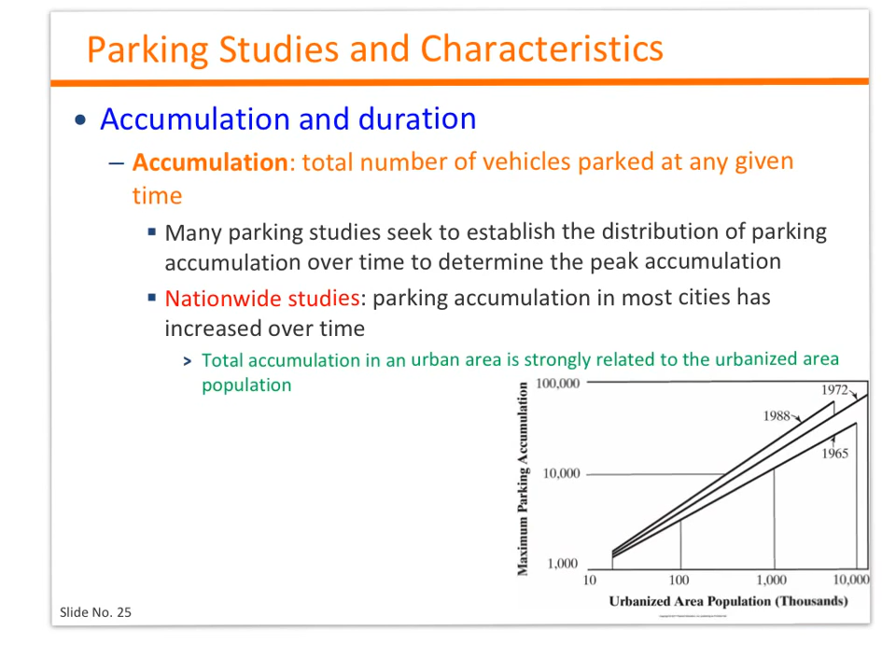So once I increase the number of population by a certain amount of people, the demand for parking would be way higher.

When it comes to duration, this is now a time measure. It's the length of time that individual vehicles remain parked. So now we're interested to know what's the average time that each one of these vehicles at any facility would be parking.

Average parking duration is also related to the size of the urban area, with average duration increasing with urban area population as well.

As you can see in this graph, the duration is increasing as the urbanized area population increases. For the same thing, if we pick a city like Tyler here, this is the size of Tyler.

If you could see here, the average parking based on this study shows it's around an hour and a half, versus another city that has, let's say, a couple million people, so it's going to be somewhere around here, and now it's about 3 hours.

So there is, as you see, a clear relationship between the increase in the number of people in the city and its relation to the parking need.

This table here is also very interesting, showing the average duration of parking in two different cities as well as two different times. For example, we are comparing Boston in 1972 with Charlotte in 1987.

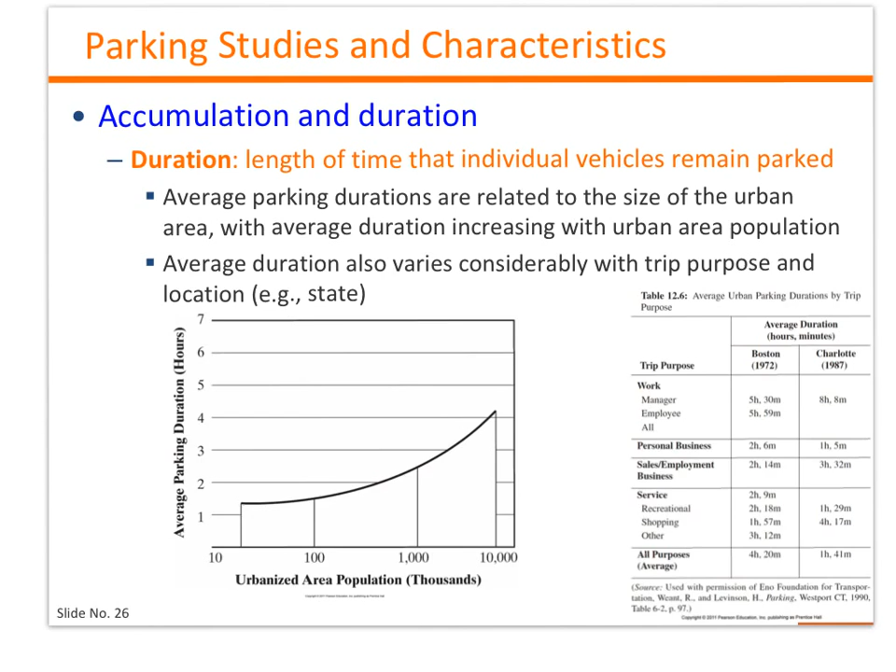So the question now, how are we gonna measure the accumulation and duration in a parking spot? The most commonly used technique for observing duration and accumulation characteristics of curb parking and surface parking lots is by simply recording the license plate numbers for the parked vehicles.

Most of the time, you're not gonna write all the plate numbers. We typically have the last 3 digits. We record the last 3 digits, as you could see here in this form. So 631, that would be the last 3 digits for that plate for that car.

Something interesting we need to keep in mind when we do a parking study: we need to keep going through the parking spot at regular intervals ranging from 10 to 30 minutes. For example, this study here started at 7, and you would notice a car at a certain location, then you come back at 7:30, 8, 8:30. This study was done every half an hour, so the interval is every half an hour. While, if I'm asking you to do a parking study for 1 hour, the interval will be a bit less, typically every 15 minutes.

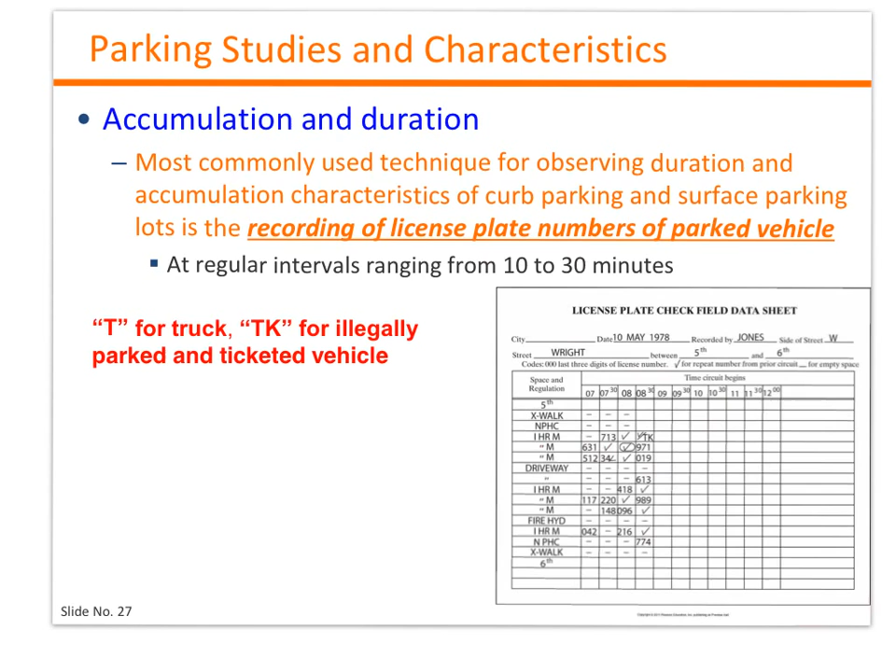So how can we do the calculation? The two equations we need to obtain and calculate: the first one is the average parking duration, which is D. D is simply the average parking duration, how many hours per vehicle - I'm interested to know every vehicle is spending how much time at the parking facility. This is equal to the summation of NX, which is the number of vehicles parked for X intervals, times the number of that interval parked.

Another characteristic we are interested to measure and obtain is the parking turnover rate. TR, turnover rate, is equal to NT, which is the parking turnover, the total number of parked vehicles observed, over the multiplication of PS times TS. PS is the total number of legal parking stalls, times TS, which is the duration of the study period.

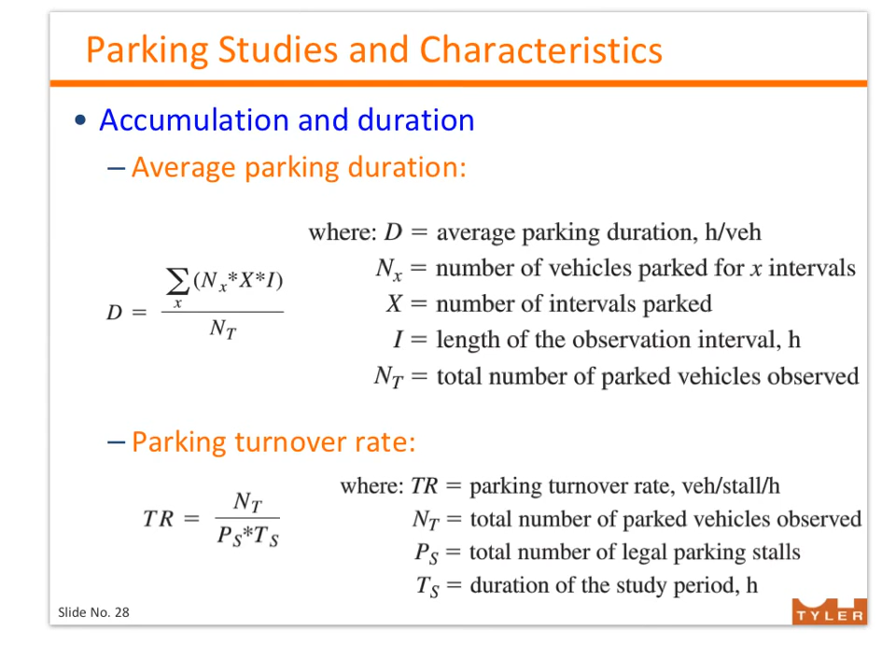And we're gonna go through an example and see how we calculate these two numbers. This here, table 12.7 in your textbook, shows a typical parking study field sheet for one location. This is for just one block out of several blocks in the same parking facility, because you cannot do the entire parking facility all at once - we will divide the parking facility into several blocks. So table 12.7 is showing the information and the parking field sheet for block face 61.

And for this parking spot or parking block named 61, there are that many parking spaces. So there is parking space named 1, 2, 3, 4, and there is a hydrant, and then we're having 1, 2, 3, 4, 5.

We have 5 parking spots with a 1 hour limitation, and 4 parking spots with a 2 hour limitation. The parking study starts at 8 and finishes at 3, and the interval is half an hour. So I would go observe the parking block, wait for half an hour, come back and observe it again to make my observations.

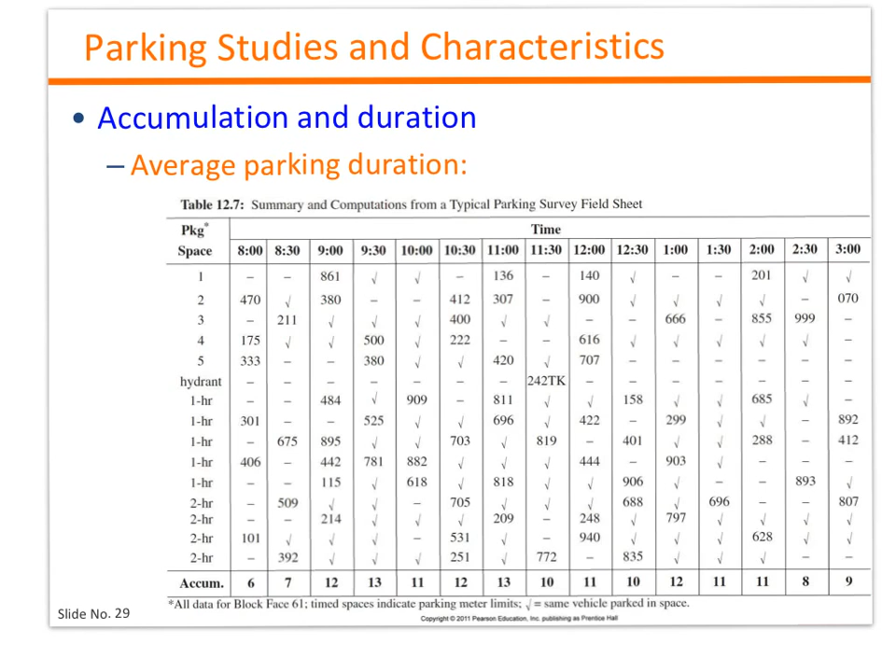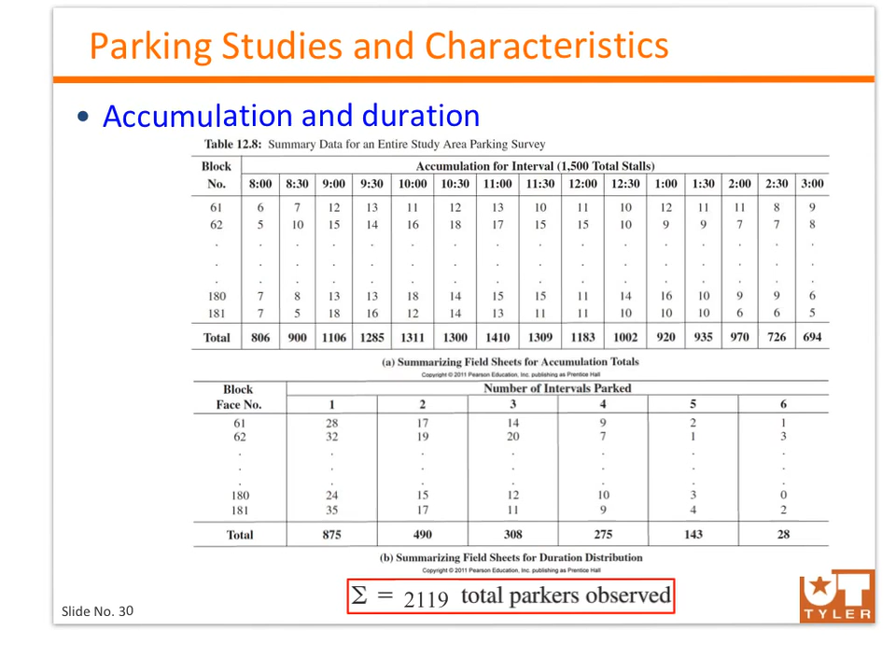Now that we understand the two equations, for convenience only the last 3 numbers of the license plates need to be recorded. In most states, the initial 2 or 3 letters or numbers represent a code indicating where the plate registration was issued, so these are often repetitive for many plates - that's why we don't include them.

How can we get the average duration? Going back to the equation: we have 875 vehicles who stayed for one interval times 1 - this one interval times 0.5, which is 0.5 hours, half an hour. We also had 490 vehicles who stayed for 2 intervals times 0.5.

And the list goes all the way until we had 28 vehicles times 6, who stayed for 6 intervals times 0.5, which is half an hour. So here, when I multiply 3 times 0.5 or 2 times 0.5, I'm multiplying the number of intervals times the interval length, which gives me the total amount of time each vehicle stayed over the total number of vehicles observed, and this gives us the average duration. So on average, every vehicle is staying there for 1.1 hours, coming and then leaving.

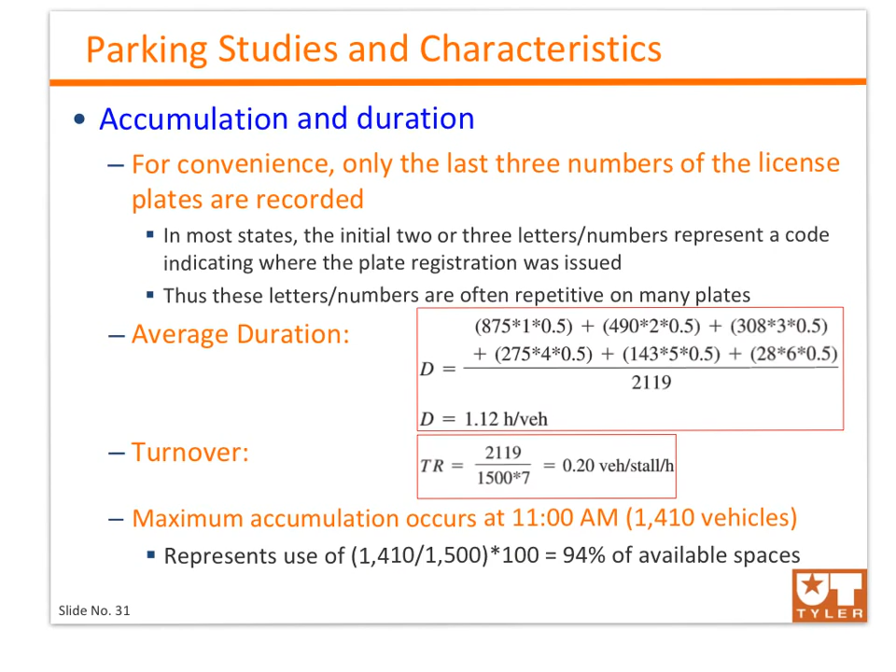Now let's shift gears to the design aspects of parking facilities.

When it comes to off-street parking facilities, they're provided at surface lots or parking garages. Most of the time surface lots are considerably cheaper than garages, typically costing between $1,000 and $3,000 per space. Garages are more complex, and below-ground garages are far more costly than above-ground structures. Typical cost for above-ground garages ranges from $8,000 to $15,000 per space, while below-ground garages may cost between $20,000 and $35,000 per space.

So that shows you the increase of cost from a surface lot to a garage to a below-ground garage. The decision of how to provide off-street parking involves many considerations. As a traffic engineer, we have to think of factors such as availability of land, amount of parking needed, and the cost to provide it.

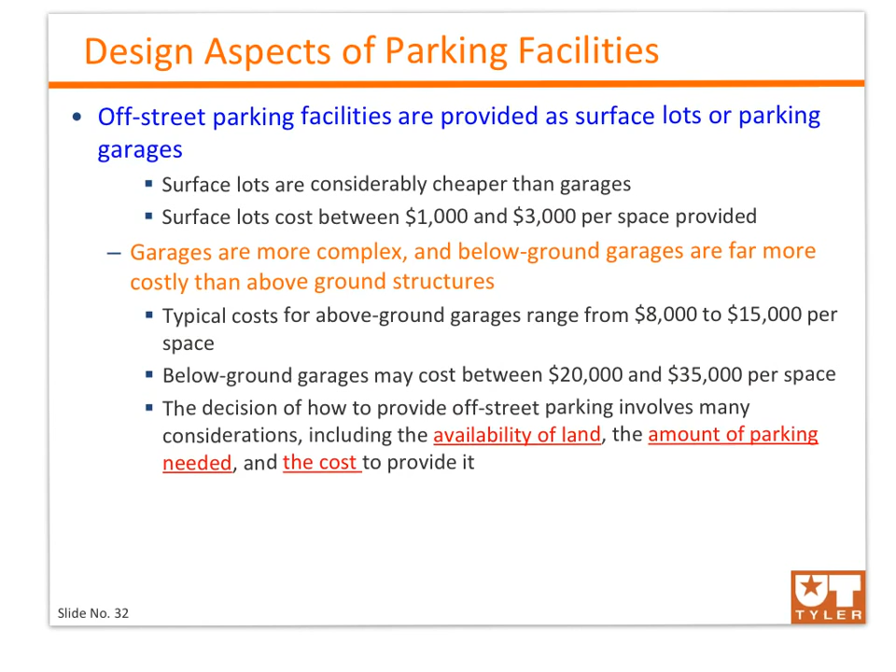For example, if you are in a packed, very urbanized city, there isn't much availability of land, so you have to think of below-ground garages, for example. You also need to keep in mind how many parking spots you need versus the cost available to come up with the parking facility.

There are three major objectives in the design of any parking facility a traffic engineer must keep in mind. First, it must be convenient and safe for the intended users. Proximity to major destinations, as well as adequate access and egress facilities, is very important. Also, these parking facilities should be space efficient and economical to operate. If it's super expensive, people will ignore the place or avoid that business center altogether, so efficient internal circulation, adequate stall dimensions, and basic security must be there.

So again, efficiency and economy. Economy: is it affordable or not? Efficiency: if I want to get to that parking spot, is there a circulation system, or just one exit? Do I have enough space for my car? And also, do I have enough security? Do I feel secure if I'm parking on the 5th or 7th story of a parking structure?

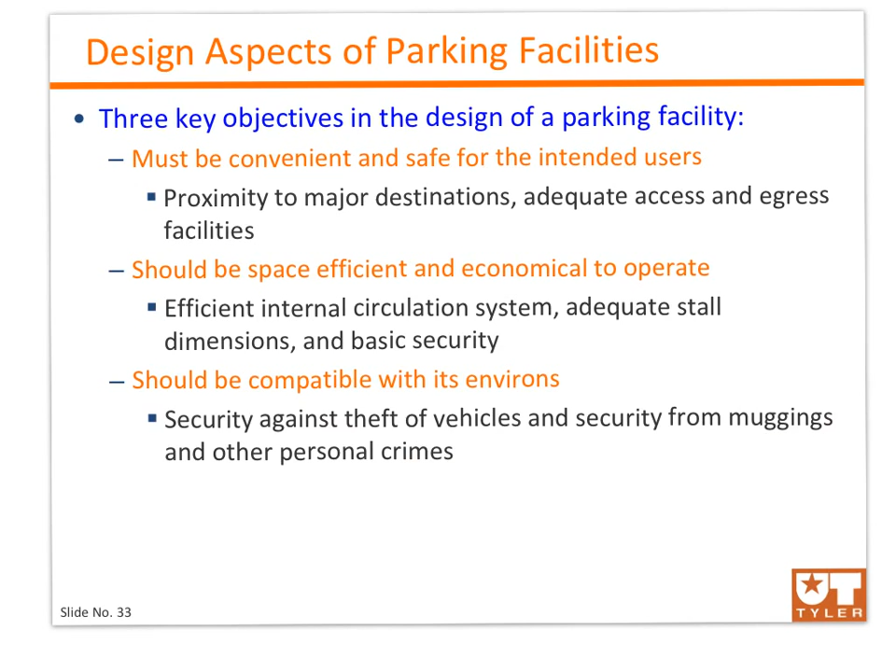The third objective is that these parking facilities should be compatible with their environment, including security against theft of vehicles and security against muggings and other personal crimes. Parking spots have to always be monitored, and the sense of security has to be high at these locations to let people park safely.

So speaking of dimensions, let's talk about basic parking dimensions, based on one of two design vehicles, where you typically have either large or small cars. Some parking facilities try to use separated parking areas for small cars to maximize the total parking capacity, which is one of the techniques used.

So as you can see here, I'm giving you some information related to the design dimensions for parking facilities for large cars versus small cars.

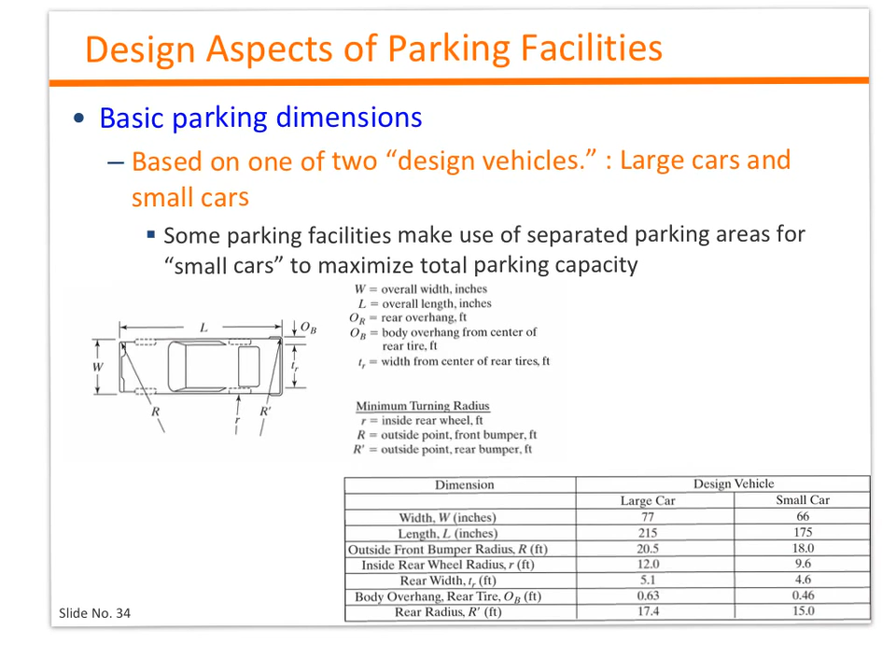One of the important dimensions is the width of the car, W. For small cars it's 66 inches versus 77 inches for large cars. When it comes to the length of the car, L, it's 175 inches for small cars versus 215 inches for large cars, all the way to information like rear radius in feet. For small cars they need 15 feet as rear radius versus 17.4 for large cars.

One of the big components when it comes to parking facility dimensions is the parking stall width, W, like what we talked about. It must be wide enough to encompass the vehicle and allow door opening clearance. It's not just the width of the vehicle, because you have to open the door to leave the car. So we have to have a minimum door opening clearance of 22 inches, but this may be increased to 26 inches where turnover rates are high.

For example, for large cars, the parking stall width should range from 77 inches, as provided in the previous table, plus 22 inches, giving us 99 inches, which is about 8.25 feet. For the maximum width, it's 77 plus 26, which is 103 inches, or 8.58 feet. So those are the minimum and maximum width for large cars.

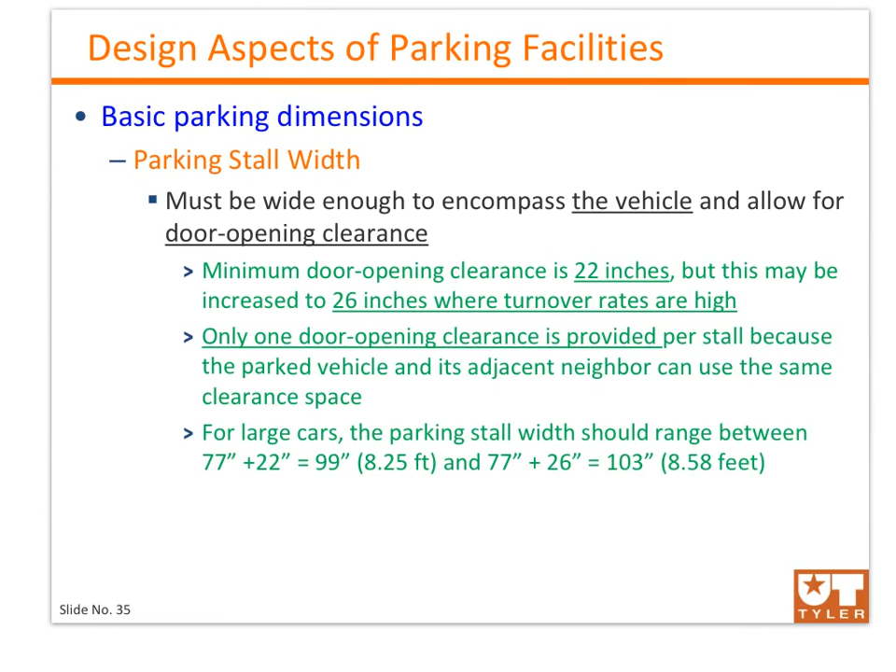Here in this table I'm showing you that there are 4 parking classes depending on turnover rates and typical users. For parking classes A, B, C, and D, the stall width can go from as high as 9 feet to as low as 8.25 feet depending on the typical turnover. If it's low turnover and the parking class is C or D, the width is 8.5 versus 8.25, while if the turnover is really high, the stall width goes all the way to 9 feet.

Typical usage for parking class A includes retail customers, banks, fast foods, and other high-turnover facilities. Parking class D is for industrial sites, universities, and commuters, where turnover is very low—you park your car for several hours, so there's no urge for a wide stall, which is why it's 8.25 feet. Versus if you're going to an ATM in front of a bank while in your car, the turnover is really high and the stall width is high.

So for small cars, the parking stall width ranges from 66 plus 22, which is 88 inches, all the way to 66 plus 26 inches, which is 92 inches. That would lead us to the design standard for small cars being typically 7.6 feet—that's the typical design width for small cars.

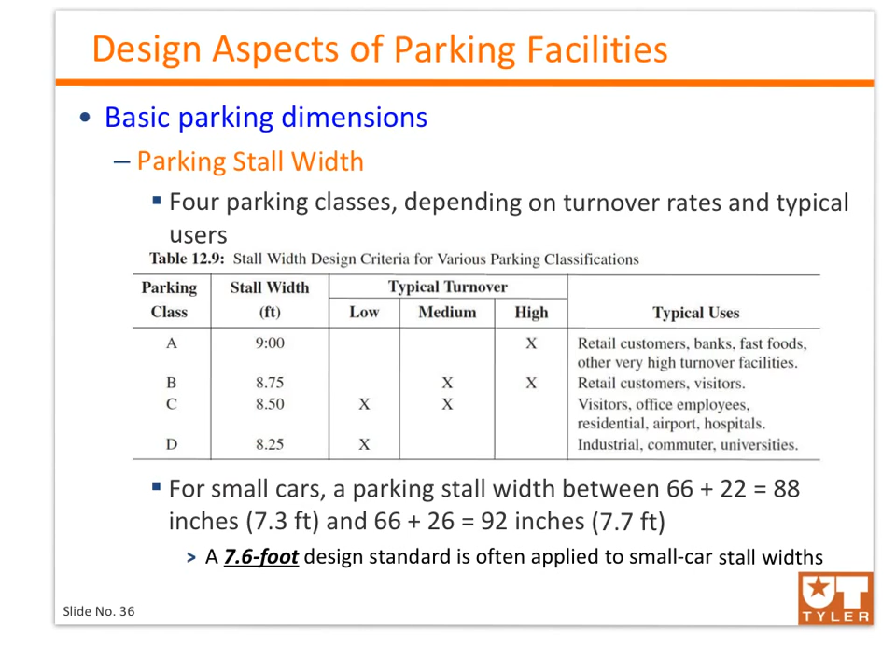When it comes to the parking stall length and depth, it has to be measured parallel to the parking angle. Generally it's taken as the length of the design vehicle plus 6 inches bumper clearance. So a length of, for example, 215 inches for large cars, like mentioned in the previous table, plus 6 inches, gives us the length. The recommended length for the parking stall is 221 inches, which is 18.4 feet.

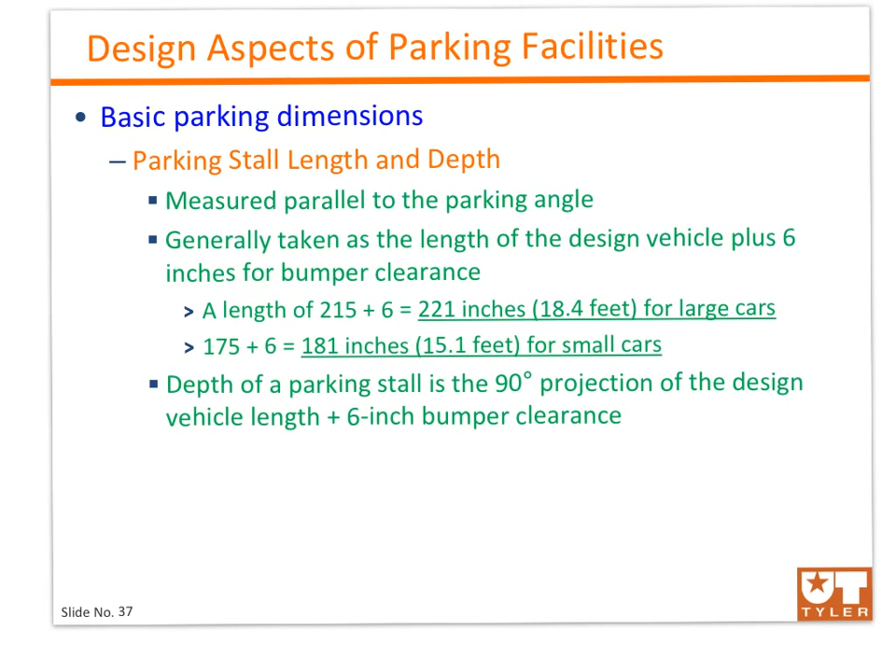And when it comes to small cars, it's 175 plus 6 inches, which equals 181 inches, or 15.1 feet. The depth of the parking stall is the 90 degree projection of the design vehicle length plus 6 inches bumper clearance. That's the rule of thumb when it comes to depth. It's as simple as that: the parking stall is the 90 degree projection of the design vehicle length plus 6 inches bumper clearance.

Now we're done with the parking stall dimension, let's move to the aisle width. The aisle width is also very important. Aisles must be sufficiently wide to allow drivers to enter and leave parking stalls safely and conveniently in a minimum number of maneuvers. I'm pretty sure all of us have been in parking facilities where you'd spend 5 to 10 minutes doing lots of maneuvers back and forth to fit your car perfectly in that spot. It shouldn't be this way. We should have enough aisle width to let us maneuver easily and park right there.

Aisles must at least have 1 maneuver on entry and 2 on departure. As parking stalls become narrower, aisles need to be a bit wider. So this is the balance you have to keep in mind. If you have very tiny parking stalls, you have to have wider aisles.

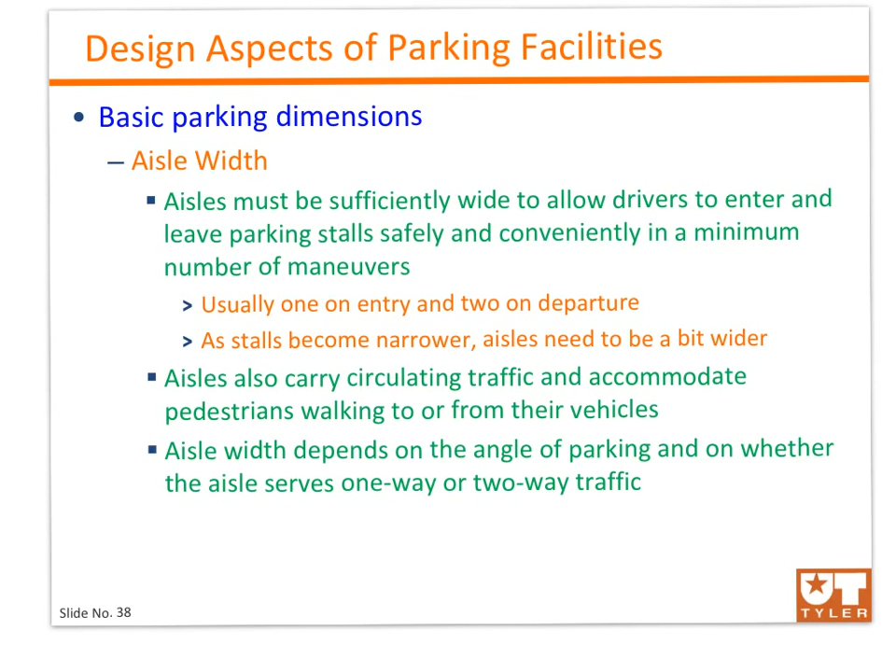Aisles also carry circulating traffic and accommodate pedestrians walking to and from the vehicles they own. So you have to keep in mind that it has to be wide enough to handle lots of pedestrians leaving their cars or getting into their cars. Aisle width also has to depend on the angle of parking and on whether the aisle serves one-way or two-way traffic. In so many parking facilities, the aisle is designed only for one way, and therefore the width will be significantly smaller compared to aisles handling two-way traffic. So that also has to be accommodated.

Now moving to parking modules, or overall designs. There are four different ways of laying out a parking module. A module can reflect only a single set of stalls against a wall, or it can be wall-to-wall double-loaded aisle, or one set of stalls can be against a wall while the other is interlocked. The fourth style is when both sets of stalls are interlocked, for example stalls interlocking with those of the next adjacent parking module.

And you would always run into operating problems with separate parking areas. That's also something debatable, whether we have to keep large car parking spots away from small cars. In that case, large cars sometimes try to force themselves into small car stalls, and small cars on the other hand try to occupy large car stalls. So there has always been a lot of debate whether or not we have to have separate parking spots for large cars versus small cars, because in so many places this idea didn't really work.

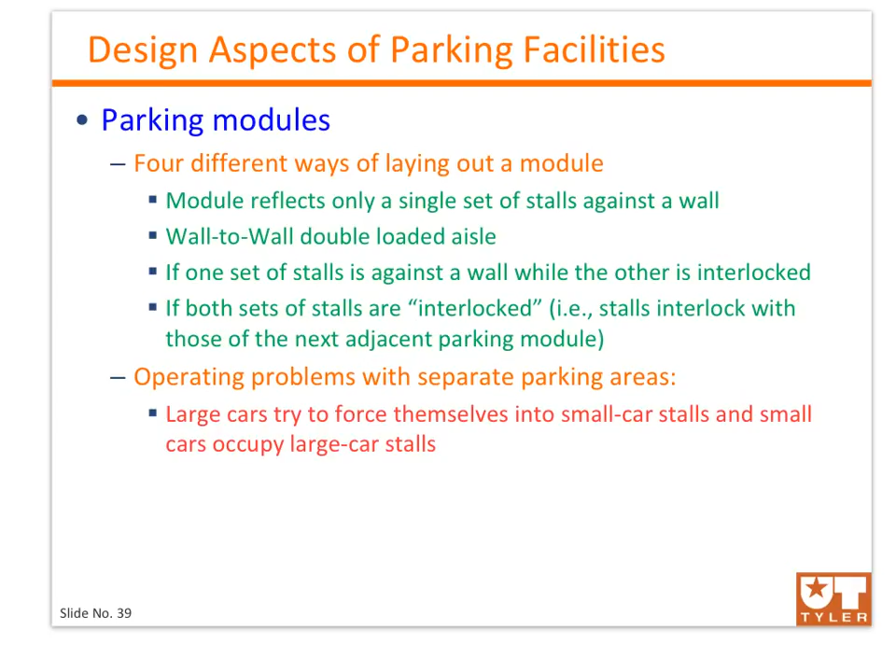So this is what I was telling you about — those are the different parking modules. W1, the first module here, is simply wall-to-wall single loaded aisle. W2, in this case, is wall-to-wall double-loaded aisles. W3 is a parking module with wall-to-interlock double-loaded, and W4 here is double-loaded aisles interlock to interlock.

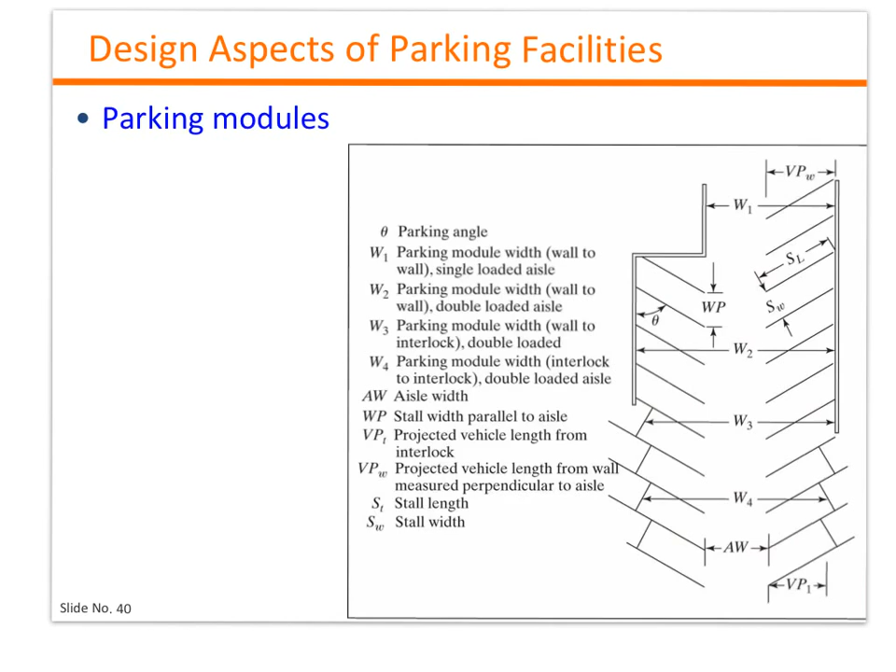So going back to the debate we mentioned, do we have to have separate parking spots for large cars versus small cars? Some designers advocate using a single size for all parking stalls. Ideally, large car dimensions would be provided for all the spaces, and this policy is typically known as OSFA, one size fits all. So basically we're trying to come up with a uniform stall and modular dimension that is the weighted average of small as well as large car criteria. In some cases, traffic engineers have advocated this policy as a means of providing more efficient use of scarce off-street parking spaces.

But however, all of the problems associated with large cars attempting to use small car spaces and aisles would still exist throughout such a facility. So there's always going to be some issues, but again, some engineers would advocate having one size fits all. The problem, though, is that large cars trying to fit through those spaces might be an issue.

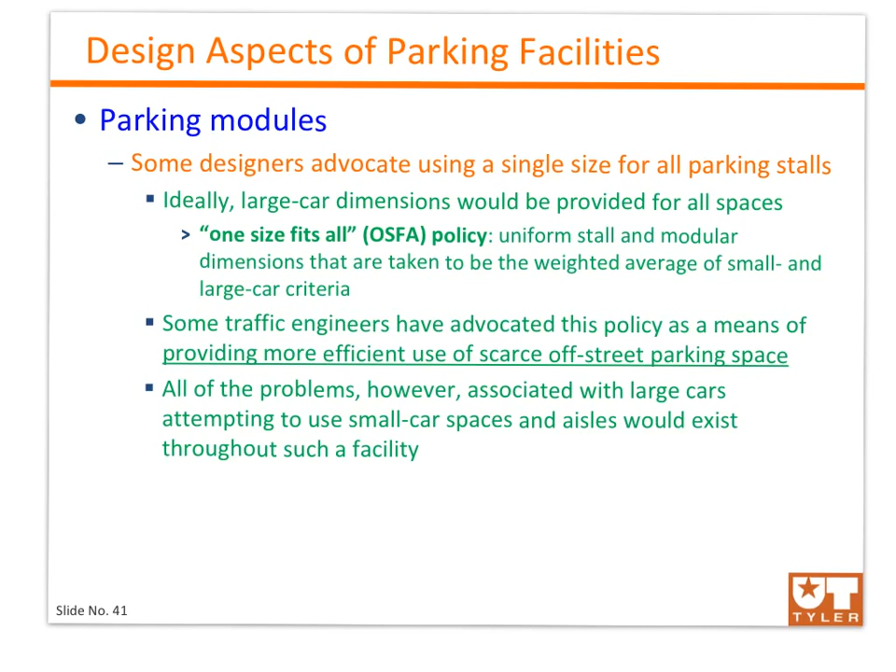While the other way of thinking, or school of thought, when it comes to parking facility design is let's just separate small and large vehicle areas. So for this school of thought, there are different techniques for separating small versus large vehicle stalls.

The very first technique is to have a complete separation of small and large size vehicles. This indicates that maximum parking layout efficiency can be obtained by completely separating small and large vehicle parking areas.

The other technique is mixing small and large size spaces in alternating rows. In this case, the large and small car modules are alternated, producing about a 50-50 split in the number of each type of stall.

The third way of separating small and large vehicles is small and large size spaces in the same row. Basically, a portion of each row is allotted to each type of vehicle. So if we have one single row, half of the row would be for small cars and the other half would be for large cars.

The fourth technique is cross aisle separation, where small car stalls are provided on one side of the aisle and large car stalls are provided on the other side. So again, several techniques here to separate small and large vehicles.

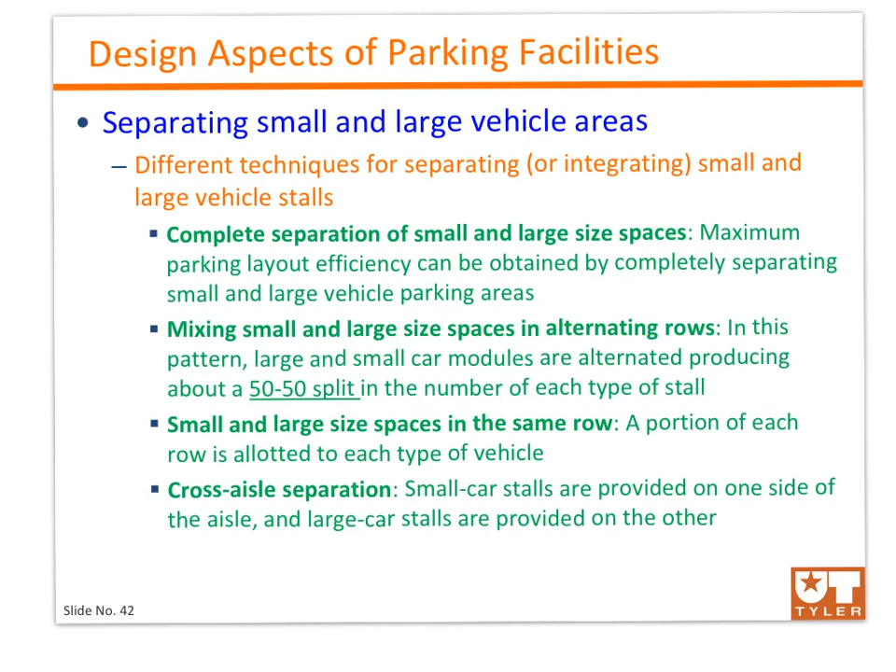This is just a picture of how we can make use of the four previously mentioned techniques for separating small versus large car stalls. We can see here some separation - full size cars here, and the width of the aisle center to center is 61 feet compared to small ones.

So here we're having alternating full versus small. Or we can have the same row, where half of the row handles small cars versus the other half full size, but now we need to make sure the width center to center is high enough to fit the big cars. Or we can have one row for full size with an angle to give more maneuvering space, versus small cars at just a 90 degree projection angle.

This is how we can mix the two together. Here we can use a distance somewhere between 51 and 61 feet, because now the full size cars have a 45 degree angle to maneuver, which makes it easier, and therefore we don't need as high a width for the aisle anymore. Those are some of the techniques, and this table shows the parking module layout dimension guidelines.

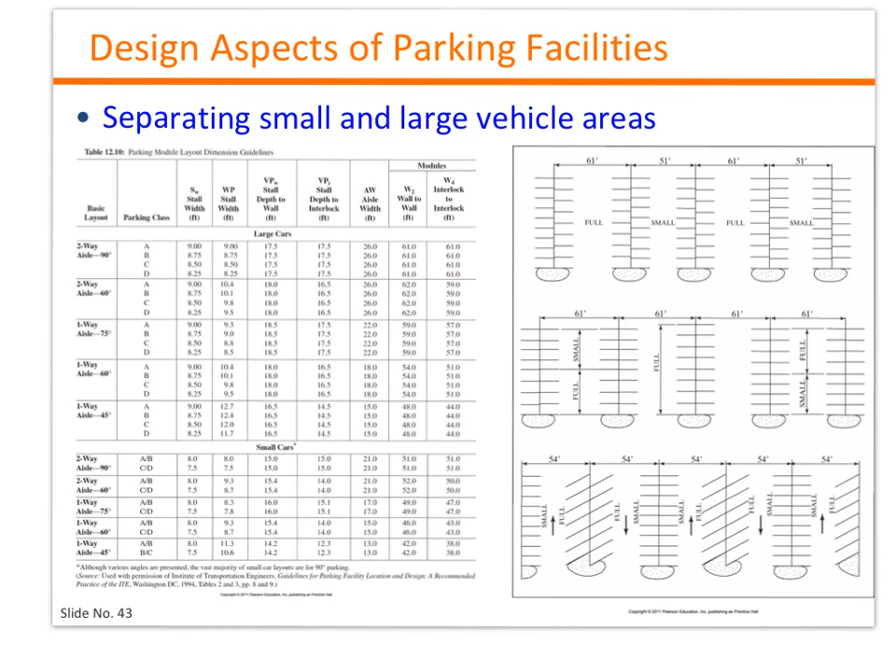When it comes to parking garages, the structure represents additional constraints now, such as the building dimensions and the location of structural columns and other features. Imagine now we're in a building, and you would see columns and certain extra constraints that weren't there in a one level parking facility.

Ideal module and stall dimensions must sometimes be compromised to work around these structural features. So parking garages have the additional burden of providing vertical as well as horizontal circulation for vehicles. It's not just about horizontal circulation now, it's vertical, since we're handling several floor plans that can handle hundreds and hundreds of cars.

This really involves a general design and layout that has to include a ramp system, at least where self-parking is involved. So if we're having self-parking, not valet parking, we have to include a ramp system in the design.

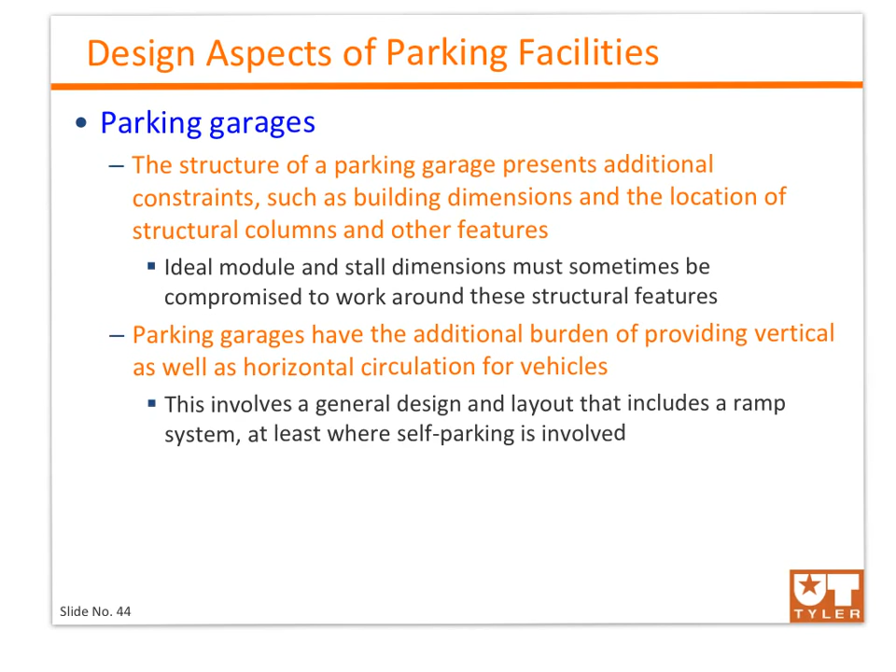So with this, we finish this chapter about parking studies and how we can design a parking facility, with all the statistics required, as well as the parking design styles we can select from. Thank you so much.